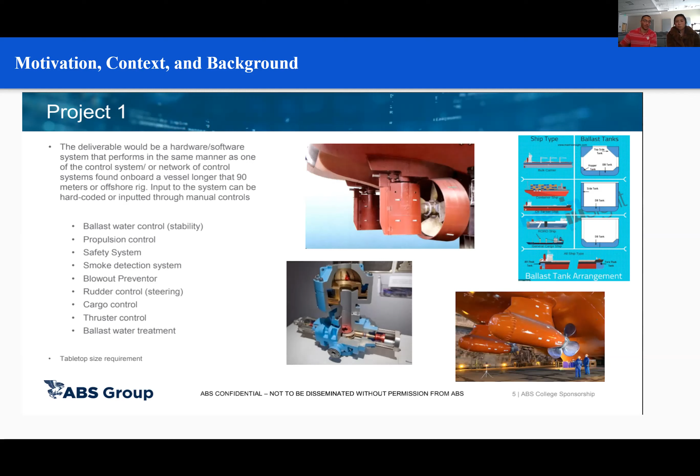So the motivation and context of this project was the American Bureau of Shipping wanted to present to U of H students this project as a hardware or software system that's modeled after the systems that are on water in real time. Harshal and Kian gave us the option to either have hard-coded inputs or manual controls. And you'll see a little bit later on that we decided to go with manual controls for the network control system, which will be the rudder and propeller control systems.

So our project is made up of a control system, which includes our client goals, which under this, we have a system with multiple measurement capabilities. So we have a measurement at the bottom, a physical measurement, and then we also have little angle measurements on the track that you can see a little, as well as the screen will show you how fast and where the rudder is. And we also made it software driven.

And then another part of our project is the IoT application, which includes the accuracy goals. And this includes that the rudder will be no more than 0.5 degrees off, and our propeller will be no more than 30 RPMs off, and the software lag will be less than 200 ms.

And what the control system and the IoT application make up is our cybersecurity test bench, which is our overall system. So we wanted it to be safe for our client, ABS. So we put up safety panels around the whole system so that no one can stick their finger or hand in there and get hurt. Nothing's going to come flying out anywhere. And then we also made it able to fit on a desk. So as you'll see in the demo, it's about 3 by 2 feet, 2 feet tall. And we modeled it after a live system.

Cool. So as far as our validation goes, we had 3 main areas. But the first one was getting the feedback for the rudder. And to do that, we utilized the potentiometer, which is a sensor with a knob. And as you turn the knob, it changes the voltage on the output. And what we did is we glued the potentiometer down on the axis of rotation of our rudder. So when the rudder spins, it will spin with the same angular displacement on the potentiometer, and we can get a range of values and convert those into degrees of rotation.

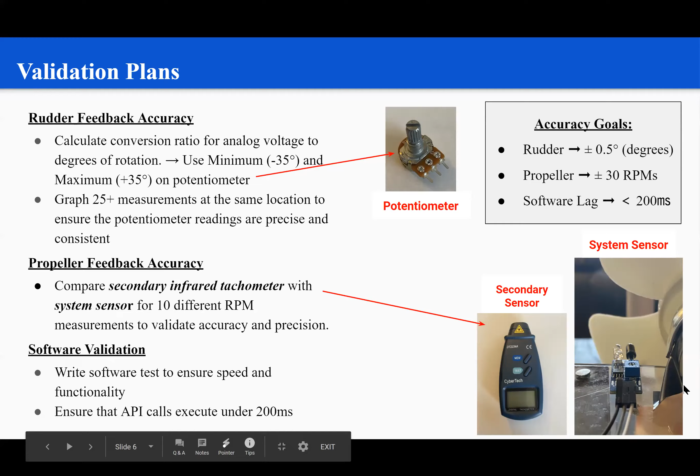Going into some of the methodology in designing this system, what me and Daniela had to do on the mechanical side and really the physical side, the hardware side of this project, was design it all on CAD, or computer aided design. And so we used SolidWorks to do that. We looked for parts online that we could go and pick up from Home Depot or Lowe's, and we designed those things first. And we kind of configured the system in a forward manner to make sure that as we added parts, the functionality remained. And we also conducted motion studies that would simulate the actual moving parts of our system. And we made sure that as we went along, we were meeting design requirements. So that's kind of how the design went.

Once we got to this semester, this fall semester, we began construction of our system. At this point, we had already configured a list of the parts that we wanted to buy. And we also had some parts on the system that we had to creatively make so that other components of our system would function properly. So we sent a bunch of those parts to the 3D printing lab here at the University of Houston, and that actually helped us out a lot with maintaining the budget and keeping costs low.

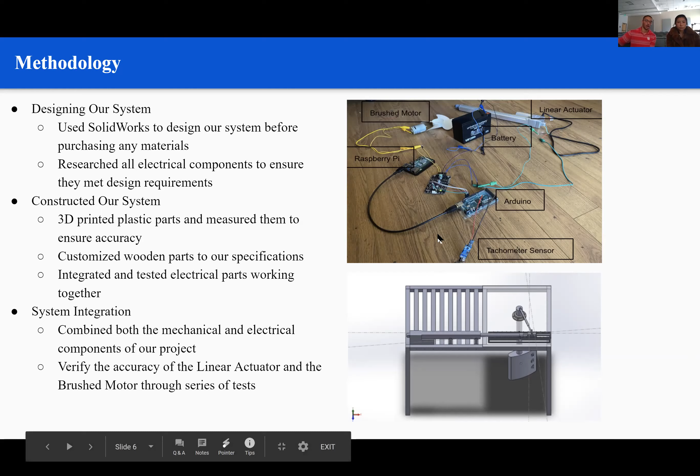During the semester, we integrated both the software and hardware of the system. Sean talked a little bit about the validation of the electrical components in the previous slide, but throughout this semester, Daniela and I were able to really validate all the things we did on the hardware side and the construction of the system by seeing Sean and Josh accurately manipulate the system through the software. So our system integration was a success, and that'll move us directly into our challenges.

During the construction, our first problem was that we ordered a linear actuator that was larger than we expected. We kind of had to throw a lot of things out of the window and start from scratch and redo things. Another challenge that we had was access to tools. None of us are builders, and none of our families had too many tools. So you can see in the middle picture that we constructed a table saw using a table that we built and a circular saw. So it was nice that worked.

Other problems we had were with the linear actuator; we actually lost feedback capability in our linear actuator. Like we talked about the potentiometer earlier, that was our remedy to that problem. We placed that potentiometer in the middle of the rudder stock cap, and we were able to see the angular displacement based off different voltage readings from the potentiometer. Another challenge that Josh and Sean had throughout this process was multi-threading on the microprocessor. And those are really our challenges throughout this project.

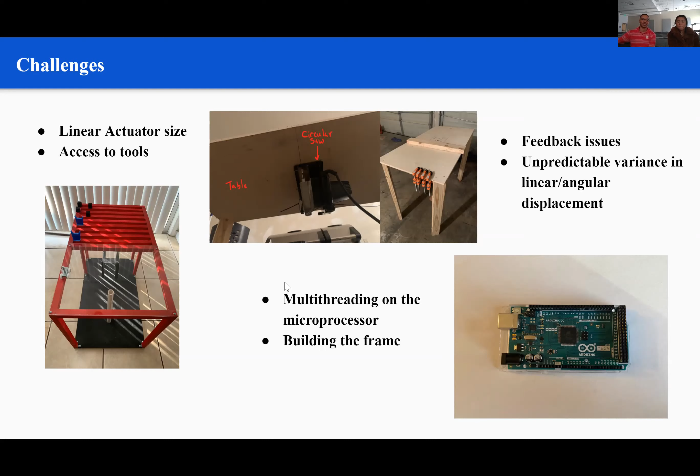Cool. So some of the main accomplishments we had over the past year was finally getting the software and the motors to integrate completely. We started testing the motors with a keyboard, and once we had that functionality, we had to do some validation to make sure that it was accurate and precise enough. Due to the nature of this project, that was very important. Since we have two fields, mechanical and electrical, working on the project, we had to integrate the frame with the motors and then do the testing over again once it was actually on there.

On the software, we created a user interface, and we needed to make sure that the user interface could control everything as well. Part of that user interface was updating certain measurements that we could send to the database and then retrieve them. On the bottom picture, you can see results validating that our API was working. I think those are response times for each of the calls that we use, and we wanted to make sure that those were under 200 milliseconds as part of our validation as well. Next slide.

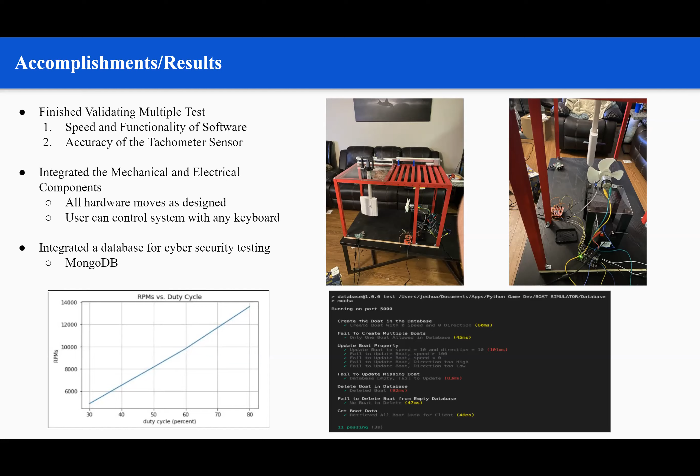Cool. So now we're going to go over some of the results from our validation plans. For the tachometer, which is to measure the RPMs, this is a graph of our secondary sensor and our system sensor on top of each other so that you can see that they correlate fairly accurately. This was good news. That means that the way we did our infrared sensor was working properly, and we went on to do some more tests. For this one, we vary the speed from 0 to 10, which is the RPM number that you'll see on the user interface. As we increase the speed, we can see the RPMs rise in a linear fashion, which means that it seems to be working really well. So next slide.

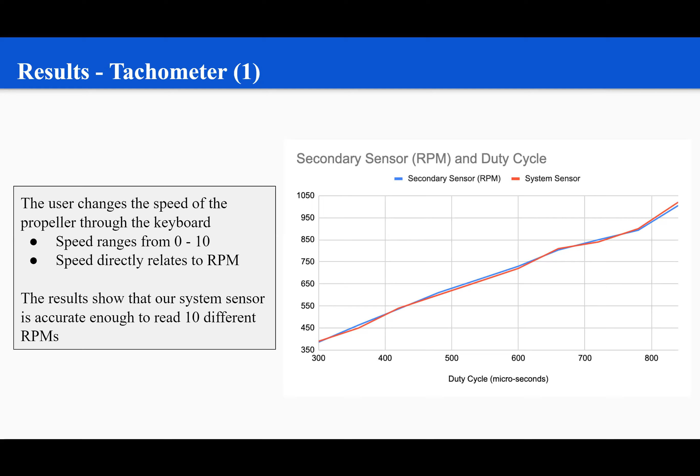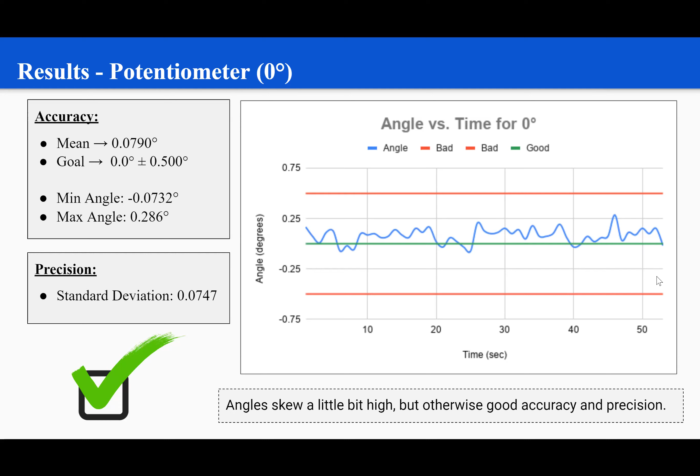And this one stayed well within the margins of error, and it seemed to be both accurate and precise. The mean was around 0.079, and this is when the potentiometer was supposed to be at 0 degrees. So yeah, 0.079 is very accurate. And the standard deviation of our variation was very low, so we could tell that it's precise as well. Next slide.

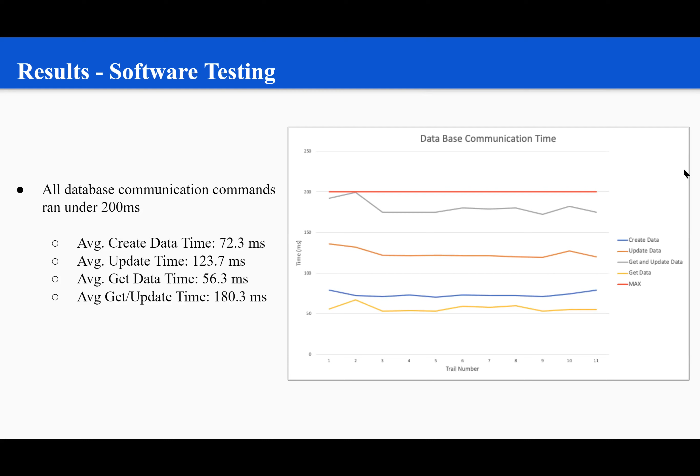And lastly, this is our results for our API response times. The gray line at the top is a really important one, because that one is used over and over again, and that's the one that we needed to be under 200 milliseconds for sure. And it seems to be just under 200 milliseconds, which fit our goals just well. And so, yeah, our API seems to work smoothly, just as we needed it to. Next slide.

So in conclusion, our project works properly. All the system integrations worked well, and we're under budget. It fits where it needs to fit. The user can control the system with the keyboard. The instructions will pop up on the screen to show you what to press to do what.

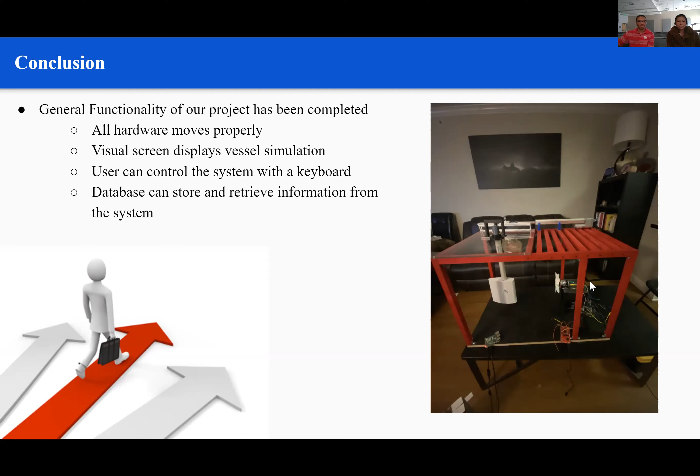So you can raise the propeller speed or change the direction of the rudder, and the database can store and retrieve information from the system for the cybersecurity engineers to use. And there'll be a visual little screen on top that you'll see in the demo right now. And that's it, that's the presentation. And now Josh is going to show you the demo.

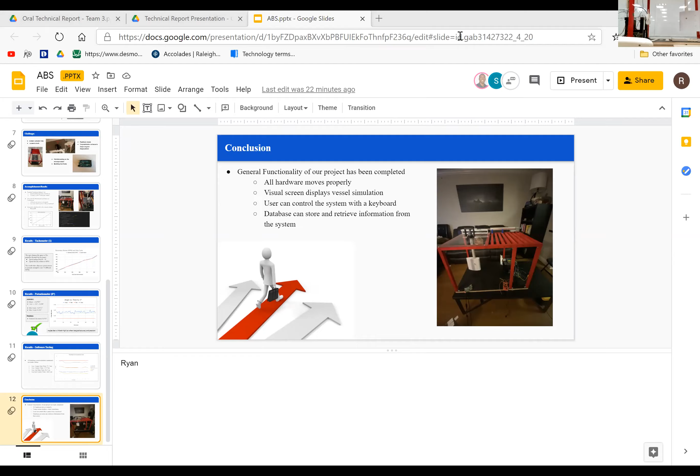Yeah, so can everyone hear me? Yeah, Josh, I'm passing over control to Harshal, actually. Yes, to Harshal. Okay. So I think everything's good.

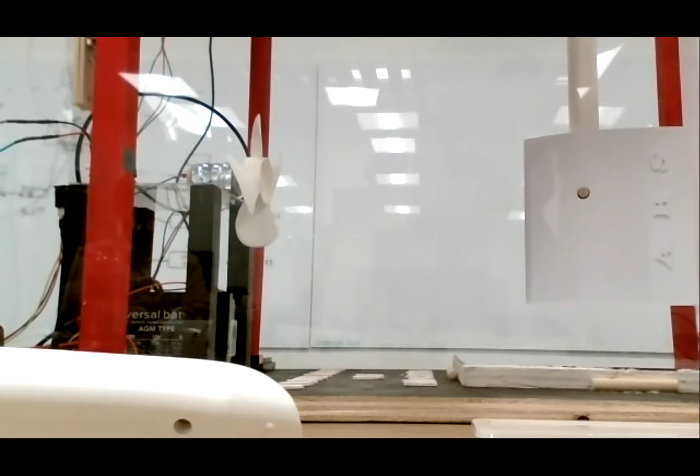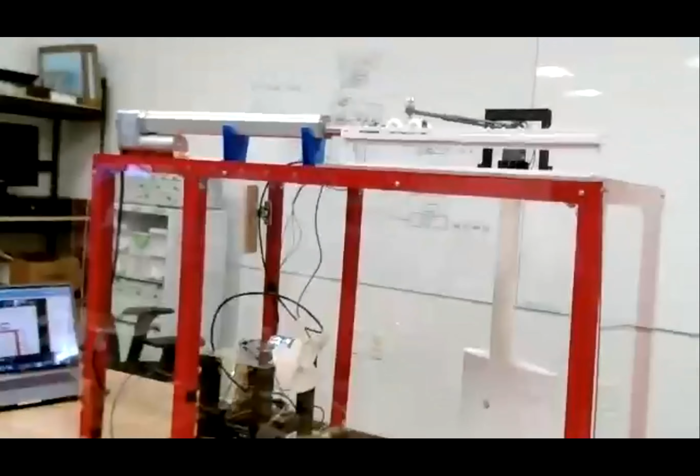Now I'm going to give you an overview of our system, show you everything with the camera, and talk through all the electrical components that went into it and how it functions. So this is the system as a whole, pretty much what you saw in the first picture. Here we can see our linear actuator. What this does is it essentially acts like a ram would on an actual vessel. So it pushes this cart across the track.

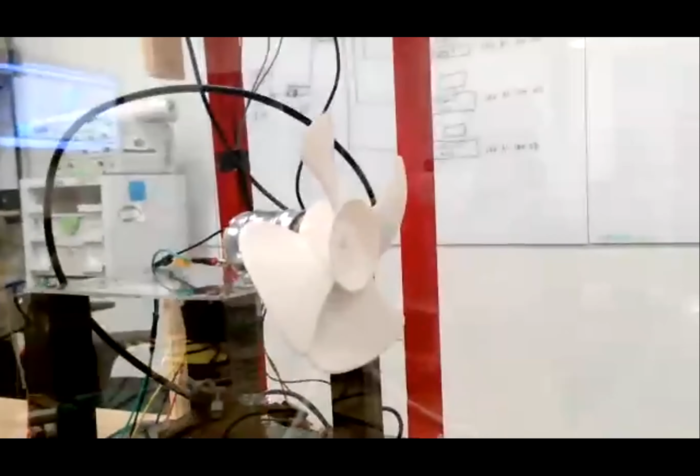And as that cart moves along the track, it's also connected to our rudder down here, and as it moves along this track, it'll cause the rudder to turn. Another key component is the propeller. This propeller is hooked up to a brushed DC motor, and that DC motor gets up to 1,000 RPMs for our system. That brushed motor is what causes the propeller to spin.

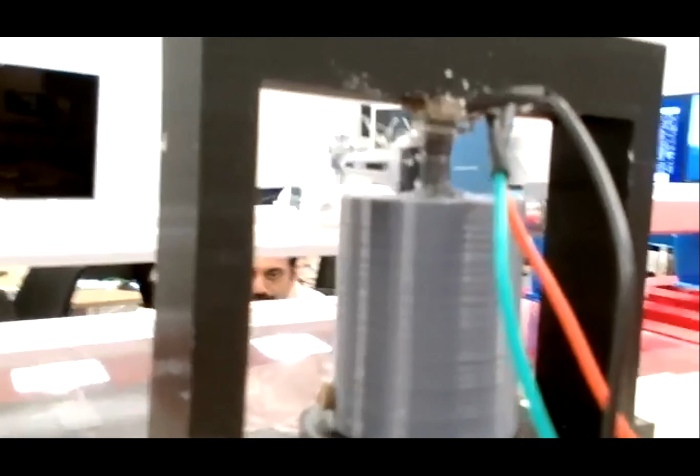So if we go a little bit more into the electronics or the 3D printing, you can see our angle measurement system. All the parts in gray and black are 3D printed, and we needed that 3D printing because we wanted it to fit on our system and work exactly how we designed it to. Inside of here, you can see a potentiometer, and that potentiometer is attached to the rudder so that it turns as the cart is moving.

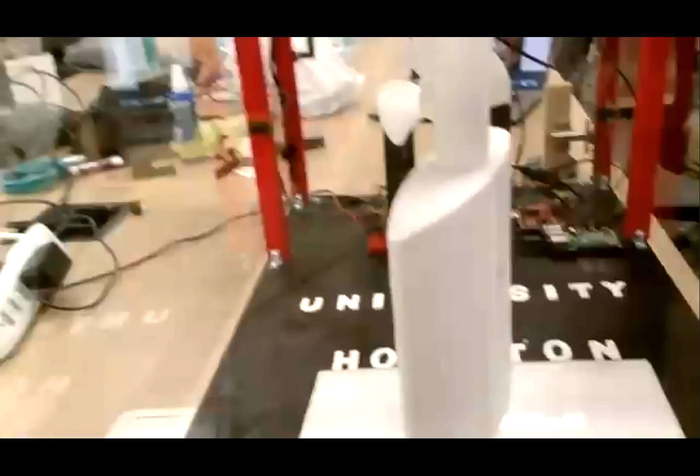And we get the voltage feedback from the potentiometer that changes as the knob is turned. And we convert those voltages into angles so that we know exactly where our rudder is positioned. Another method that you can use to tell the rudder position is the protractor down below. You can look down there as a rough estimate to see where your rudder is and where it should be.

Now, if we take a little bit more into the electronics of the project, let's see. The little black chip that you're looking at right now, that's our motor driver. The motor driver pretty much sends control electrical signals to our different motors, both the linear actuator and the brushed motor. Behind that, you can see that large black object. That's our battery.

Our battery is about 8 amp hours, and we needed that battery instead of an electrical outlet because all of our motors require a lot of amps and a lot of voltage, and this battery gives us the perfect amount of that.

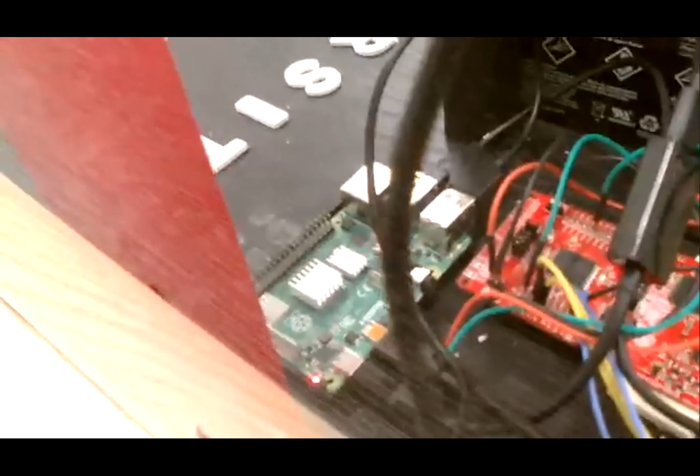We come over and look at our control electronics. In red is our MSP microcontroller, and that one's primarily used for data collection and hardware control. So that one really tells the motor, okay, move this much, move that much. The one in green is a Raspberry Pi, and that one's primarily used for database connectivity and for the user interface.

So what the user sees and has the ability to see is our screen. You can't see it right now primarily due to the lighting. But on the screen, we have an image of the boat that they're going to be able to control. And they're able to see hardware data here. And then below that, they're able to see the simulator data. So that's actually what they told it to do.

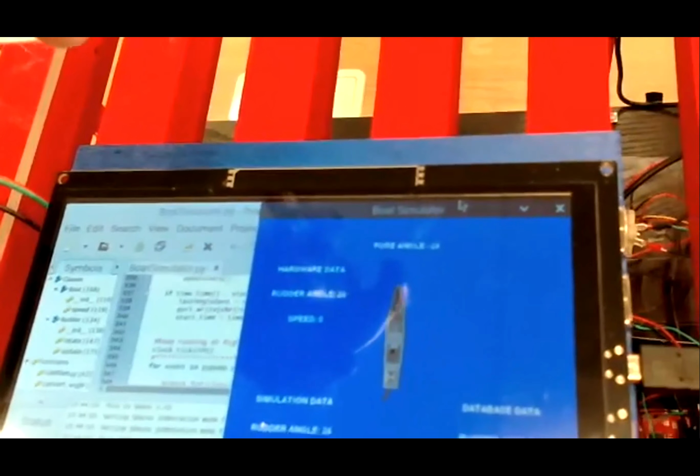And the hardware data is what the sensors are reading. If you see any discrepancy between what you told it to do and what the sensors are reading, then you know that there's some malware or some type of vulnerability introduced to your system.

You can also see on the screen the database data located here. And that is the data that's currently stored in your database. So you'll have an overall view and capability to send and retrieve data from a database that's running in the cloud.

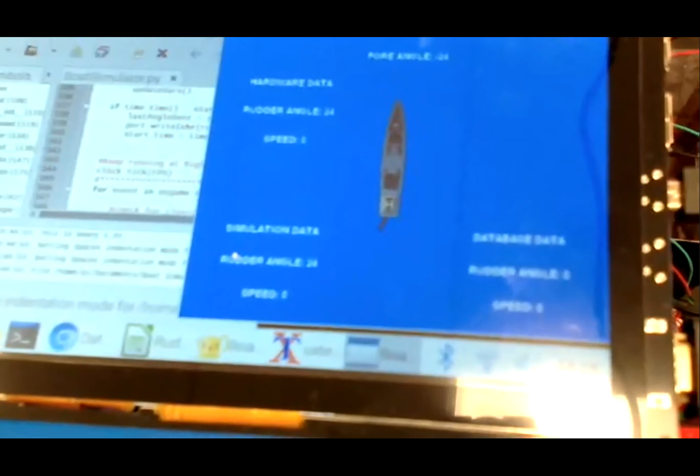So I'm gonna reposition the camera real quick, and I'm going to have all the parts moving and we'll get a good visual of everything. First I'll show you the brush motor and the propeller, which you can see on the left of the screen. All you have to do to move this is press up on your keyboard and that'll change the speed. You can also press down to decrease the speed. So I'll do that now.

So if I press up, we're at our first speed. This is the lowest speed. If I keep going up, you'll notice it gets progressively faster. And the user is able to control all this through the keyboard. So I'll turn it back down, bring it to a stop.

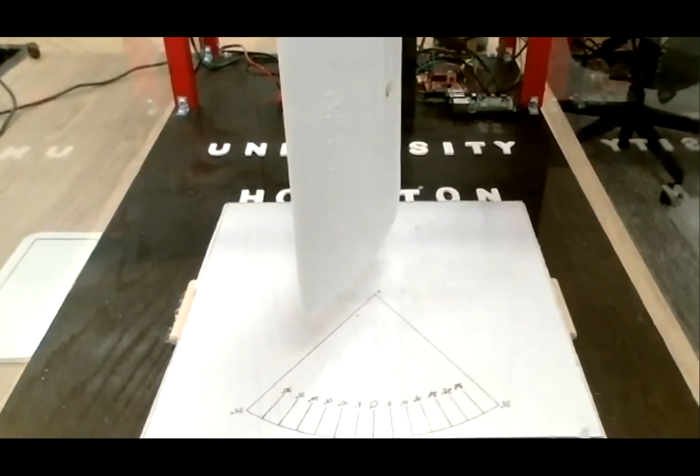Now I'll take it to the rudder so we can see the movement on there. Okay. I'm just going to position the camera here. I can turn the rudder by simply pressing the left or right keys on my keyboard as well.

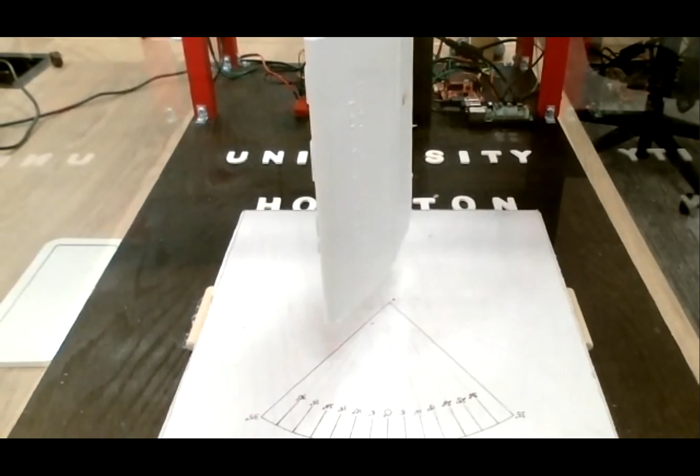We're not able to get a good visual on the screen, but on that little tablet that I showed you that's located on the top, the user is able to select what distance or length they want to go at. And it directly correlates to the protractor that you see below. So we're able to move the rudder in different positions, and we can increase the propeller at the same time, if you can see the propeller moving in the back.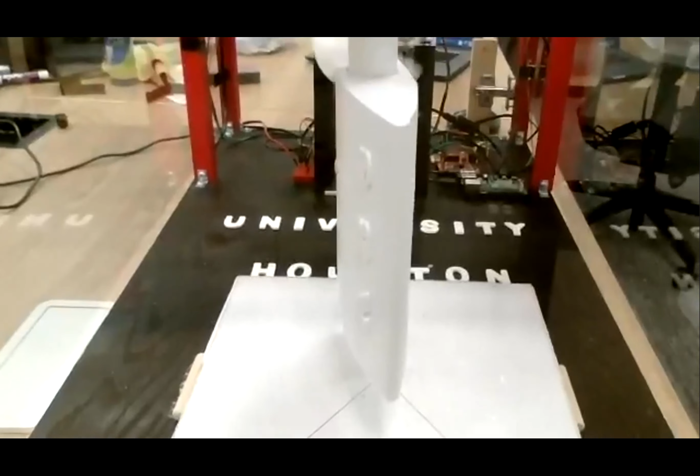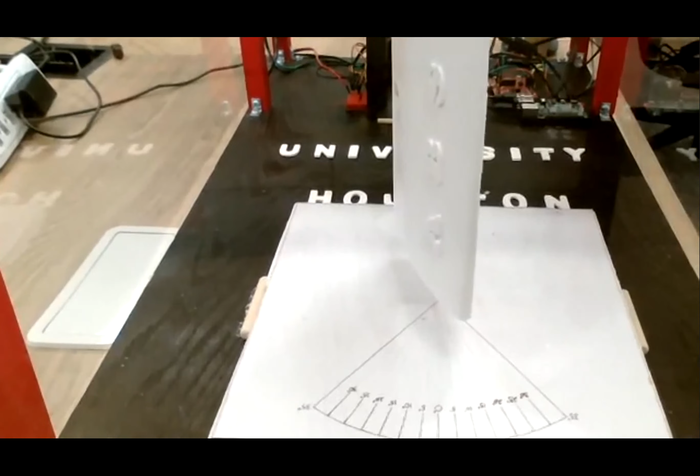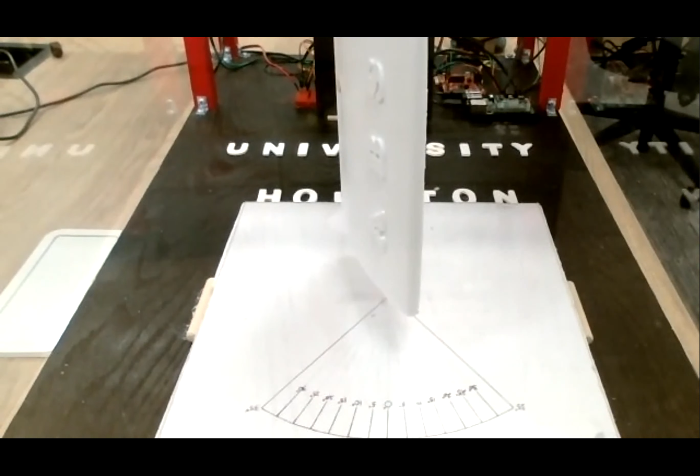That pretty much covers the movement of our project. A few more things that I should touch on, but you're not able to quite see. There are a lot of data collection capabilities with our project. So if the user wants to see what the potentiometer is actually reading at this position, at -35 or 35 degrees, they have the capability to press, I think, Q on the keyboard,

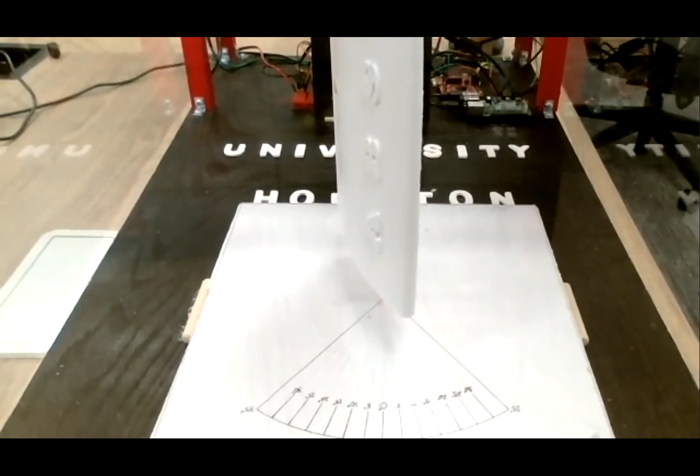and it'll go through a series of tests and data collection. Once it's done, it'll export to a CSV all the different values that were read at that certain position. So you can use that for any type of data collection or data analysis that you may want to perform.

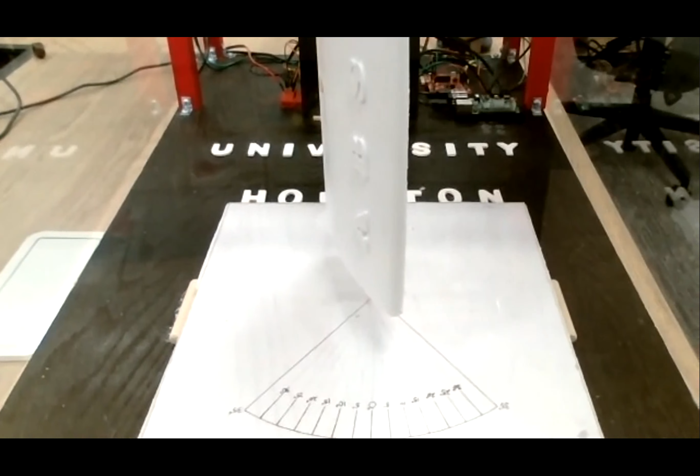Also, as far as the database, I know I kind of touched on it, but we currently have a database server running. Right now, MongoDB is what we're using for it. If the user presses S on the keyboard, it'll send data to that database, primarily through the internet. And if you press R on your keyboard, it will retrieve whatever is currently in the database, and it'll display it on the blue screen that we saw before.

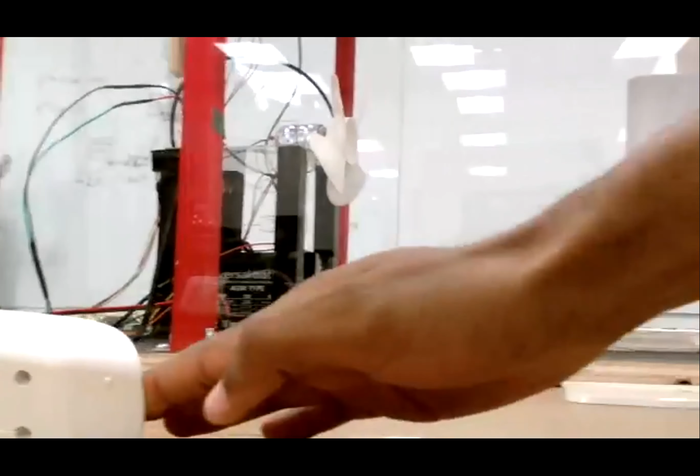And that's an overview of our project, and that touched over the different aspects of it. I guess now we can open it up to different questions.

Yeah, so does anyone have any questions or comments? No need to be shy. Feel free to throw anything at us.

Hey, this is John Jorgensen from ABS. I'm really impressed by the project. It looks really impressive, and I think it's really cool how you put it together. Tell me what the most challenging aspect of this was for the team in general. Now, each of you has individual skills and insights based on where you've come from and where you're going, based on majors, interests, and things like that.

But there were probably inevitably at least one, possibly as many as three areas in this particular project that you would have all looked at one another and said, who knows how to do that? What were those areas and what did you learn? I'll give a quick area from my perspective. I'm not really fully aware with software manipulation and running all these systems at the same time.

And throughout the conception of this project, I learned so much more about specifically multi-threading and being able to manipulate several components of a control system at once. And working with Josh and Sean, I learned a lot about that, and about the necessary coding that goes in behind that and things of that nature. Yeah. Okay, what did you learn about testing your software there? And Josh, feel free to jump in on that.